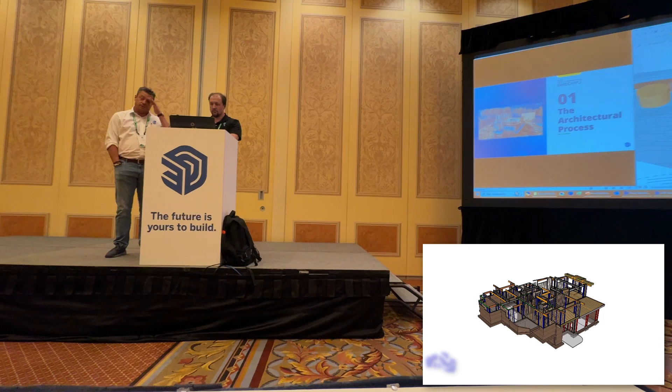So a little background on this project. This is a project inside the town of Truckee, which brought along its own set of issues because it's on a pretty steep slope. As you can see, it's between 10 and 15%. The first thing the client asked me, we're on site and I'm looking at their steep slope, and the wife said, I want a driveway that is as flat as we possibly can have. And I immediately let them know the impacts of that on an upsloping lot, meaning that the garage is going to be fully retained to the site.

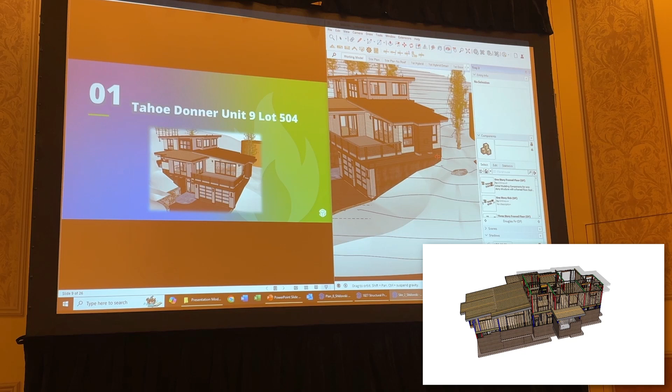So I told them that we're looking at pretty high premiums on the construction cost in order to make that happen. On this home, as an example, I think we had 1,300 cubic yards of export on the property. Along with the added concrete, some of the walls in the back of the garage get up to as much as 12 to 13 feet in height. Knowing this and working with Zachary a lot, it helps me to approach the project to try and minimize the impact of that excavation as much as possible.

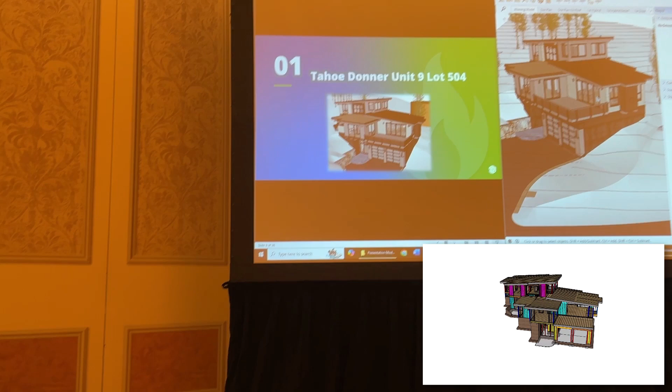So as the home progresses into the hillside, I did a lot of stepping and elevation change within the crawl space and foundation area so that we didn't have a continuous 12-foot retaining wall all the way around. So once we get past the entry, those retaining walls start to reduce to about 8 feet of height. And originally, I was thinking this is all going to help us out with our height because we have a new height restriction in the town of Truckee that makes absolutely no sense.

And even with the middle wall retaining 6 feet in that back corner and doing an 8-foot high plate on the top floor, we only gain about 12 to 18 inches below the building height restriction. This was one of the first projects to be reviewed under their new height restrictions. So I let them know these are the impacts. We're not going to have too many traditional homes anyway. It's going to have to be more low profile roofs. And they seemed pleased with themselves. So it was even more frustrating dealing with that aspect.

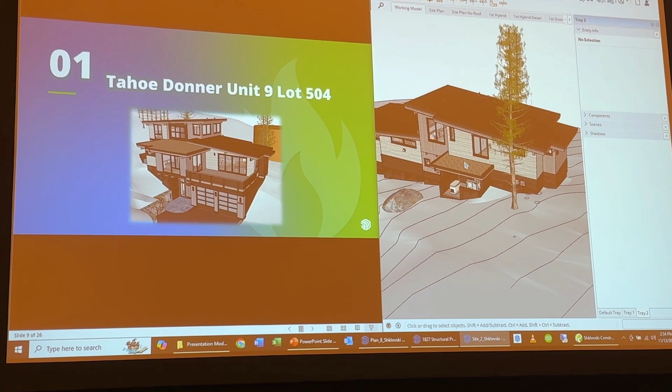But over the years and experience, I know a lot of thicknesses that we typically deal with for our floor cavity, for our roof cavity. I'm pretty good at guesstimating sizes of beams so that I'm not going to be completely surprised when David and Jesse get on board. So usually I get them involved not when the model is at this level, which is construction documents level. I get them involved right at the end of schematic design when it's really just simple openings, simple structure, to get some initial studies to make sure we're on course for not only beam sizes but shear walls.

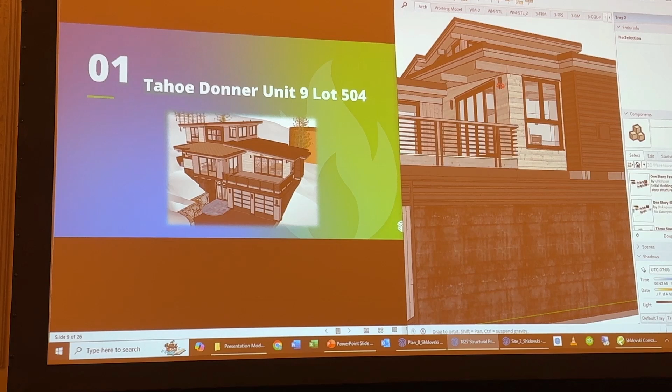This home in particular had a little bit of an issue with this rooftop deck and then a large window running across the garage on the rake side, so not the bearing side, but still taking quite a bit of load at that location. So I knew we were going to have a big beam spanning right across the entire garage. It kind of worked with the client's program. They wanted oversized garage doors. So while these look tall and skinny, those are actually 10-foot wide doors by 11-foot 3-inch tall.

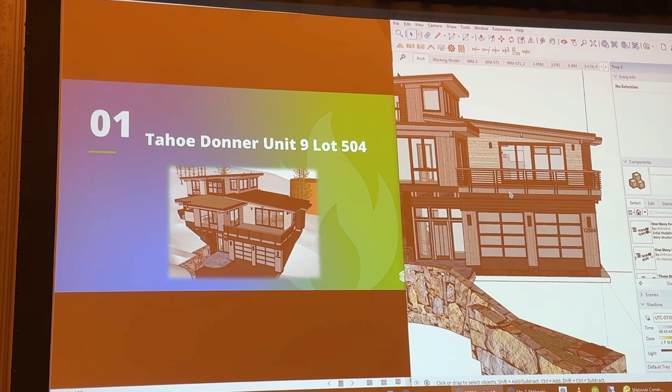And so I think our floor to floor on this is 16 feet from the garage doors to the middle main level. And so as I'm progressing through these designs, as an architect in our area, we have to be very cognizant of structure because we are also in an earthquake zone, high wind zone, and extremely heavy snow load zone. So the snow load on this property, I think the ground snow load was 249 pounds per square foot, which wasn't that bad.

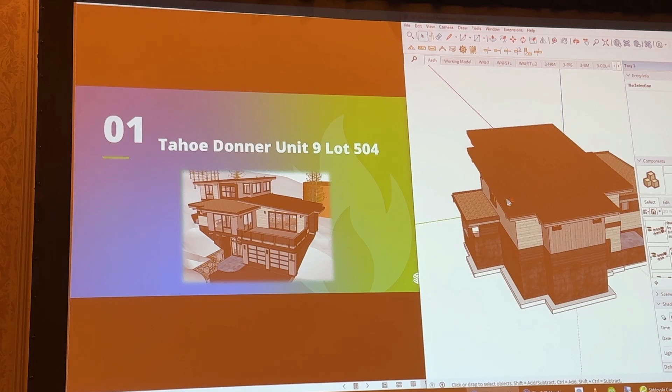My house is actually only about a mile from this home, and my snow load jumps up to 350 pounds per square foot. But it's a giant amount of weight. You know, we're talking about the weight of parking cars on top of cars on the roof. It's significant. And so we have to be careful how our roof forms work, that they are snow friendly, that they shed away from people, away from where cars are, away from areas that could sustain damage.

You'll notice there's a little roof over what is a generator and the heat pumps on the outside. We have to put those under a cover or they will just get completely destroyed in the wintertime. In fact, the generator won't even kick on if you have it just sitting out in the snow, because once its exhaust is filled with snow, it shuts down. So you have to have them under some type of snow cover. So you can imagine that, yeah, I want a generator. It only costs $5,000. Unfortunately, the enclosure we have to do will cost you another $75,000.

So then some people decide maybe the battery packs are a better solution than the generator, but these folks are wanting a generator. And so I do try to combine them with areas like if we have heat pumps or if we have just standard condensers, we need a cover over those anyways. So we just make them a little larger so we can still maintain all the clearance requirements between the heat pumps to the wall, heat pumps to the generator to the wall, and so on. It just keeps compiling.

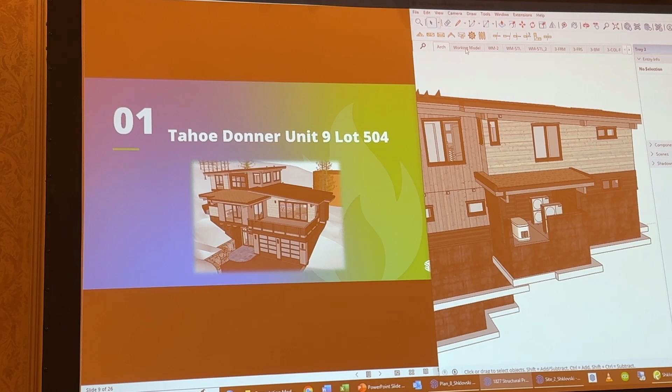But that said, what I do then is I will usually get a preliminary model from Jesse, and we'll start talking about lots of different things. One in particular, when we get down to the foundation, is making sure we have clear paths within the crawl spaces to run all of our ductwork, making sure we have ceiling areas that have soffits set at correct heights so that we can freely run our plumbing and ductwork as well, so that we can actually service all the different areas.

This one was a bit of a challenge because they actually had an outdoor patio area that ended up being fully enclosed with the exception of that one opening you're seeing right with the cursor. And so I had to run a deep soffit all the way across that space because above that were two bedroom suites. So we've got to be able to run all our ductwork and keep it insulated, because it's technically exterior space because it's not heated.

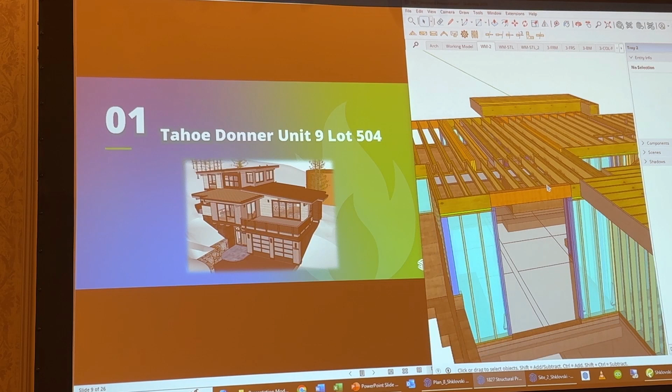The owner someday wants to close it in, so we set it up for that. We set the slab down enough that he can come in with a sleeper system, insulate it, and actually I think we call for insulating the slab anyways, but he can add additional insulation and then flooring and make it flush to the main home. So it'll be a simple conversion when he wants to do that.

And so Jesse and I will just go back and forth. I'll get a preliminary model. He'll size some beams for me that I'm concerned about. Sometimes I'll ask him for one right away, specifically, so I can see what the impact is and go through it with the client and give them some options, like that steel beam going across the middle of the great room.

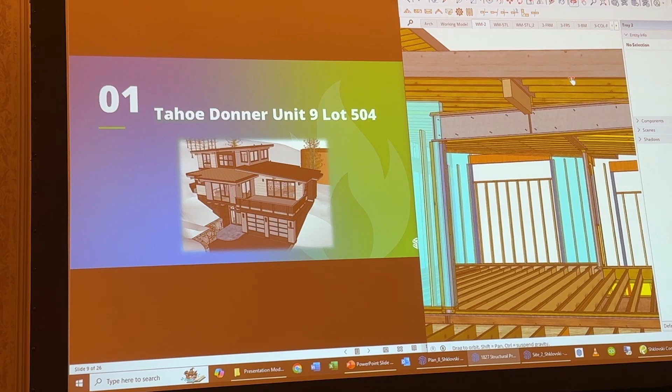Originally, we were going to run a beam down low, and I looked at the client and said, do you want the ceiling just to run all the way through, and we can do some false beams up pretty tight, or do you want a true wood beam, or steel, I guess, because it's such a big span and a huge load, running right through that living room. And so he got to choose and be involved with even that type of detail, which I think clients really appreciate.

And we can let them know that there's a cost impact. I mean, at that stage, we're not giving them hard numbers, but you're probably adding another $20,000 for that steel beam pushed up into the joist bay, and now the joists are hung instead of sitting. That all has impacts on cost, on how it's installed. And so it's really nice.

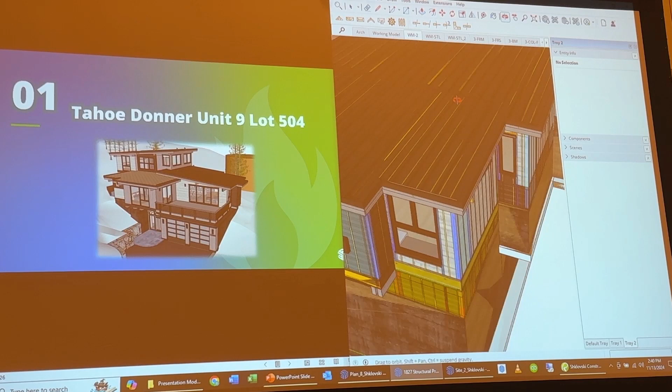You can see in this model, you notice Jesse actually has my model loaded into it. So that's how we do our coordination meetings: we just look through the model after Jesse has sized some things up. And Jesse's good about saying, hey, some of these are going to project into the space. This is where we are. And then I can address it architecturally.

And so we'll go through the model, and most of the time our meetings are short because we just do this. We go through the whole house, check each space. We go up underneath into the crawl space to make sure we have the openings that we need to continuously run any ductwork or plumbing or drainage, things like that.

Likewise, these guys also do all of my civil engineering on every project, which they don't use SketchUp for. They do use Civil 3D. And what is nice about what I do initially is before civil engineering became required, which is what's happened because a lot of architects aren't the best at figuring out drainage, it is something I always dealt with.

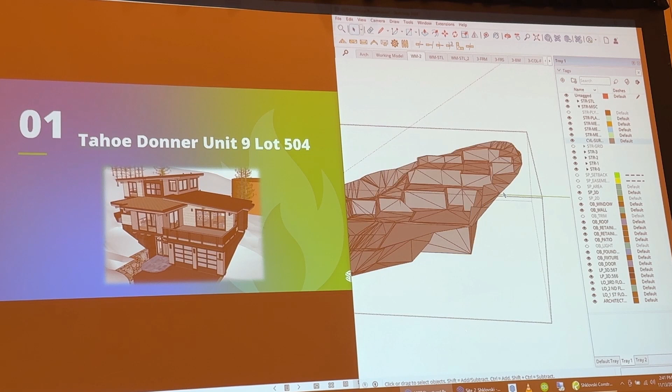So in my model, before they even see it, I start to physically model the drainage around the home. So I create the swales to code as best we can in the mountain environment. And I let them know to look at where I'm cutting. I'll identify this is where we're going to have a major cut in the front. This is where we're going to have a major cut in the back. Originally, we had this as tiered retaining walls.

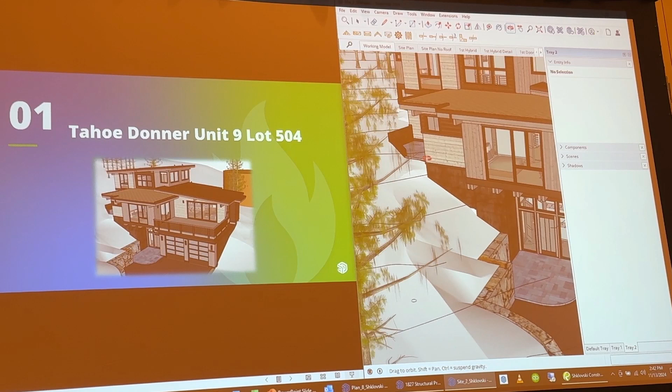And at the time, we had this new rule they implemented on retaining walls that you can't go over 6 feet in height unless you get a special use permit, which was a 3-month process. Again, something we've been doing for the last 30 years. So they've pulled back on that. Now it can be done just as a variance, which is nice. But we didn't have that luxury.

So we had to pull out all the retaining walls and change all the grading and set our walls at 6 foot max. And then they required both me and Jesse to pin the elevations of those retaining walls all the way down to the area drain. God love government agencies, just the best.

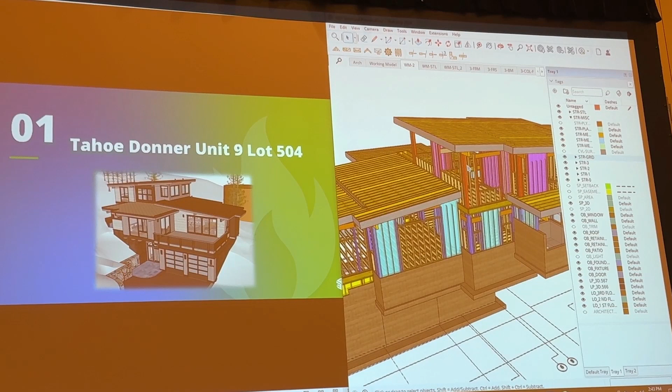And so if you're lucky enough to have a good structural engineer that utilizes SketchUp, it makes for a much more streamlined process. We just don't run into the headaches in the field unless something has been changed by the contractor. We just don't see giant change orders anymore, or any issues with headers on stairs, or having enough shear wall, or a window or a door being in the wrong location, because they're physically modeling right off of my 3D model. And so it just coordinates by itself. You just don't run into those issues.

Except occasionally when I have a hood vent that backs up to a double-sided strong wall, and then I call Jesse in the field and say, hey Jesse, I need a 10-inch square hole in that shear wall all the way through. And while I was on the site, before I left, we had an SK ready to go to the inspector with the fix for that, which, if you're interested, required two 1/4-inch steel plates on either side of the wall with, how many screws?

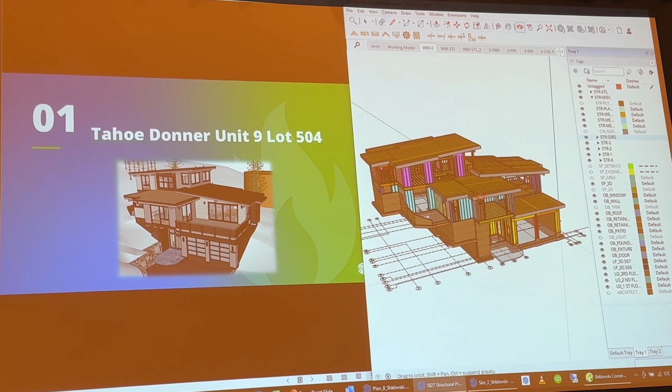There's like 30 screws each side, but still, overall, a fairly simple fix for the contractor in the field, especially this contractor in particular, as he has a robotic plasma cutter. So he can get the plates out to the site within an hour if he needs. Yeah, we send a DXF out. They actually send him a DXF for the plate, and they load the DXF into the plasma cutter. Yeah, exactly. With that contractor, I've done some pretty cool stuff on decorative knife plates. Well, actually, they were structural knife plates.

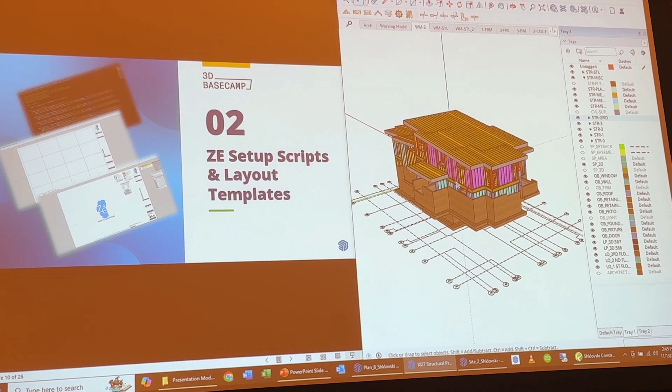There's an old SketchUp video from when I did the first videos. It's an octagonal room with roof framing, all 12x12s that come to a single point. The center steel ring is a series of these giant knife plates, partially exposed on the underside, into each of those 12 rafter spots.

Mike got the DXF file, they fabricated it, and I think they had it out on site within 3 days. It was massive, probably 5-foot diameter plates, and it just fit right into place.

I usually try to get them involved at the end of schematic design, once we have HOA approval of the basic massing of the building and the client has accepted the floor plan, the layout, and the general look of the home. Then I'll get them started, because on a lot of homes I'm making assumptions on beam sizes and ceiling joists.

I typically set them for 14-inch LVLs, and on this one we had to bump up to 16s because of the span. So those are adjustments I'll make in my model to match, which is nice because I'll take their model, push and pull it up, and clean it up against where it hits a wall or the eaves.

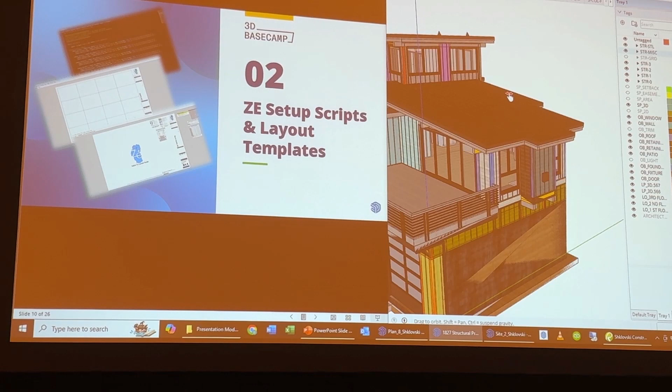So as Nick mentioned, we get a model from Nick, and from there it's about setting it up so it'll talk to our system. It takes a minute to figure out how you want to set up a plan set, you look at the architectural and go, okay, here I've got 1 floor, 2 floors, and a base floor. So this is probably going to be a 3-level plan set.

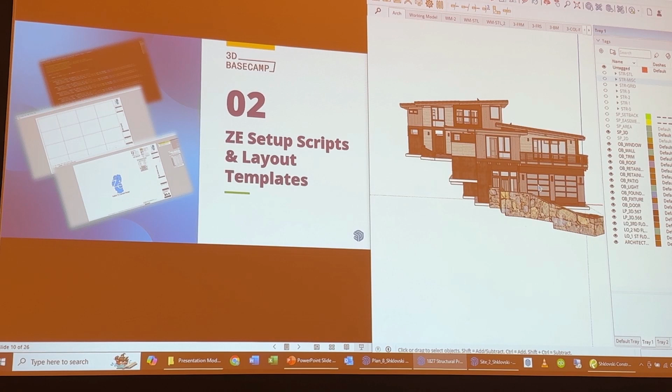It's going to be slab at the bottom, we have the garage, so in my head I'm thinking, okay, we've got a 3-story slab floor. That's the plan set we're going to order with.

We start there because everything we do from the beginning, running our scripts, relates to the components we bring into the model, modeled directly in his model. So there are no coordination issues from the start. All of that talks to a 3-story slab template that relates to the same components we ran the script on.

By doing that, we've made it very quick to go from his model to, a day later, having rough wall outlines, and we can have a discussion very quickly before we even get into design about what it looks like.

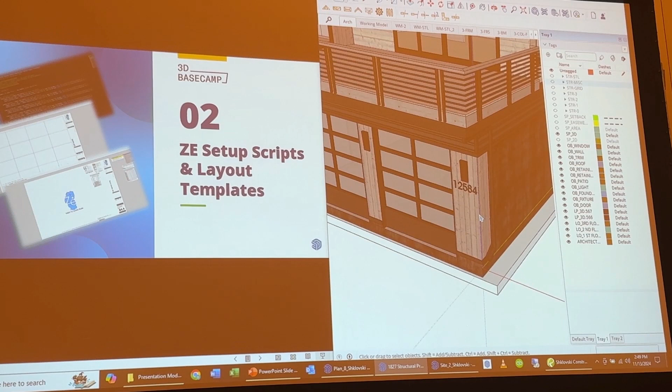That also allows us to match his plan set exactly. So when you're turning sheets in the actual set, the corner right here is at the exact same point on the page. If you're trying to stack and compare, or a contractor is looking at the paper, your eyes don't move, which is better because you're not jumping around and won't miss things.

One thing that's really important is Nick sends us his walls at 5.5 inches, so 2x stuff fits right in there, and we can align things perfectly.

We don't have to deal with sheetrock and siding and other things. A lot of architecture firms we work with don't always do that, so you have to do some workarounds sometimes. It's in coordination before you even get to start modeling. Where's your stuff, guys? I need to know where to put it. I can do it for the whole house, but I need to know. With Nick's, it's so clean, I can get this and start modeling.

I think our first meeting was like 2 days after you first sent us the model. Okay, well, here we go, let's get moving. Which is pretty cool on a house this size. How many architects are in here?

Do you show finishes on your plans? Or sheathing? Good, that's the right answer.

There are a lot of architects that want to show everything, they want to show too much, and it's hard to get it across. But if you have a contractor in the same room, ask the contractor if they care in the construction documents if they're showing the drywall, and they say no, I just want to know where the stud is. I want the outside face of stud, the foundation edge, that's what we build to. Everything else gets added on to that. So there is absolutely no reason to be showing all of that at the level of detail for a quarter-inch plan, which is what these models generate. Now when I do my details, and these guys as well, they won't necessarily show finish. That's when you add all the extra material on those things. That keeps the models very light, fast, and easy to document for construction documents, because everybody wants face of stud dimensions.

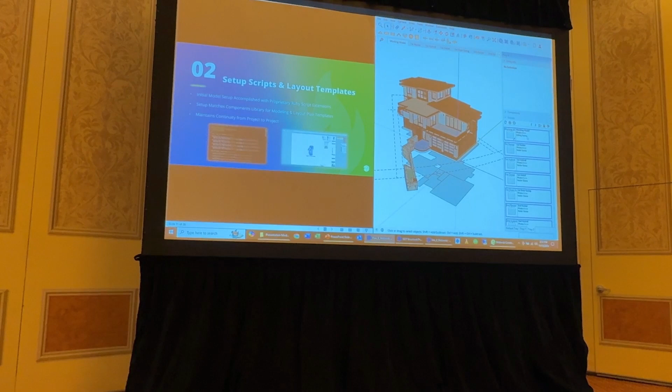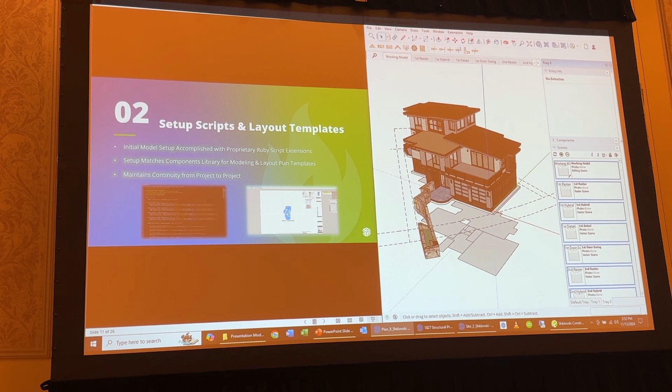Okay, we're just going to focus kind of on the stuff that I just talked about. So this is Nick's blank model, right? The first thing I'm going to do in here is remove all the stuff that doesn't really help us. All his scenes help him a lot, but they don't help us at all. We have his PDFs, we have his layout documents, so having them in the model is not that important, since we're going to make it our structural model like his architectural model. So we're just going to go ahead and delete the scenes, right?

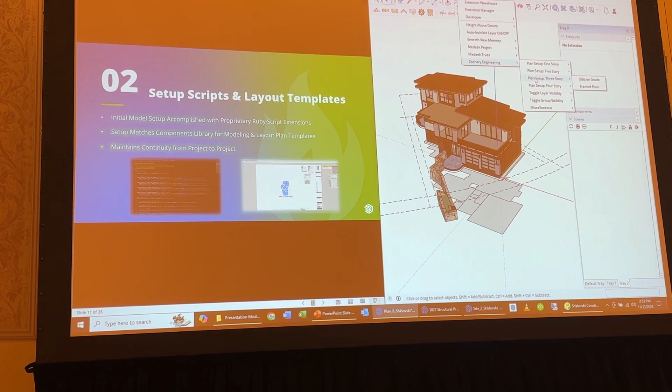And we just talked about, we've got that 3-story with a slab on grade. So our internal extensions, we have these set up for all our various options - 2-story slab, frame, 3-story, 4-story, and all our fun stuff. But we've got 3-story with a slab and garage. So what's going to happen here is - actually, before I do that, I'm going to go to this. Keep my little prompts - suggest you. It's a 4-hour process.

It started, I wrote the first one about 12 years ago, and it's developed a long way since then. It can do an awful lot.

So what it's actually doing here is we are generating all of the tags that we need to match all of our templates. All those tags are getting put on the correct scenes, automatically.

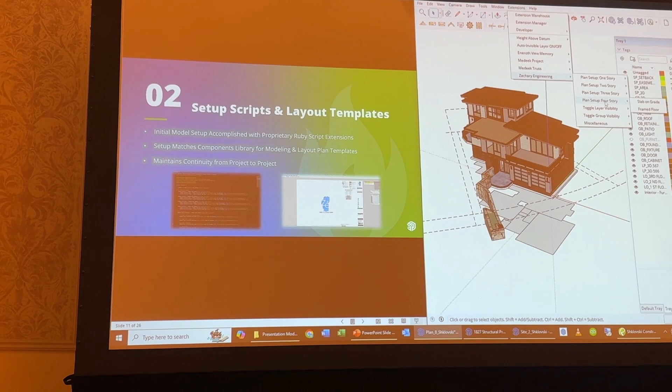We stack our viewports with our raster at the bottom, and then multiple vectors on top. So we'd have our framing down below, which we'd fade out with fog. Then on a framing page, you have your beams, and a column on top of that, so you can see the columns above the beams. If you put the column layer below, you can't tell what's where. We use a coloring system to tell on the plan whether the column is above or below.

So it's setting all that up. It's deleting any extraneous guides. It's setting up our custom styles for various scenes. And it's setting to a parallel projection top view and adding fog to all the framing layers. I'm sure it's doing a couple of things I forgot, but that's the general sense here.

Let's watch it run. Yesterday it ran okay. Let's see, no goes, all that. It eliminates about 4 hours at least per project.

So we see it drop all the tags there. It's working on the scenes. Good as heck, and good to go.

So if we go ahead and expand all these, we've seen what is added. Also now we add all of our potential steel shop layers into every project, as I've created templates for that as well. So every project has those in case we end up doing steel at the end.

But that's everything that thing just generated. Even on this slow computer with a bunch of stuff going on, that was pretty darn quick, right? Here's the scenes, and all of our scenes are here.

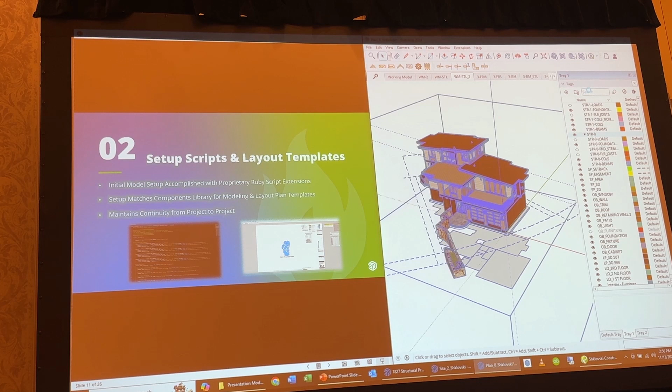Alright, we'll still hear stuff. Okay, so from there, essentially the same thing. We've already got all these scenes set up. They're the same between the two models, obviously, because I just ran it to show it.

But what we're going to do is go to our internal component library, and we're going to look at our modeling, our basic modeling. I know in this project, in that area, we're going to use a Doug fir number.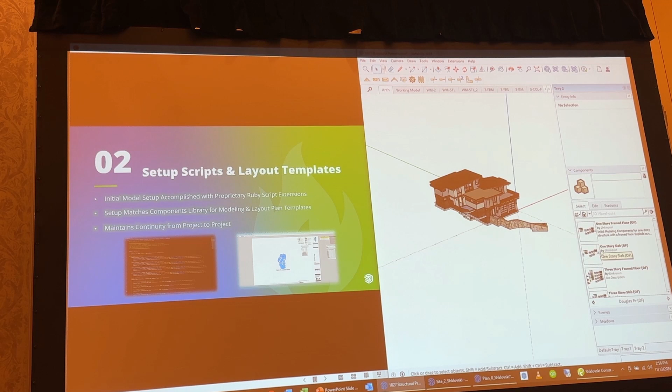Okay, that's important, and I'll show you where it comes in. We're going to go to the 3-story slab again, grab the 3-story slab and pause. 3-story slab. Oh, now this one's going to freak out too.

Here it is. Oh, so the layers are turned off here, but I'm just going to click it. We'll turn the layers on. Text.

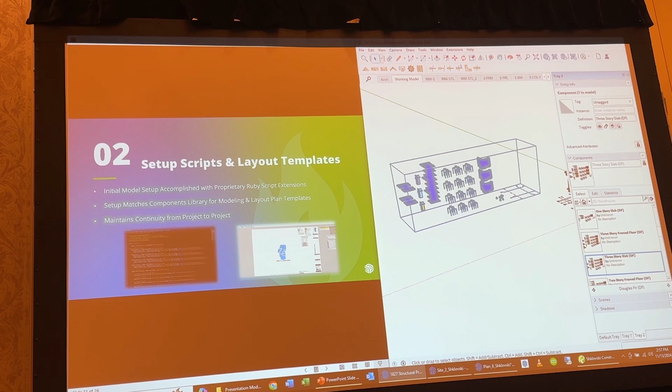There we go. Okay, so you can see what we just dropped in here, all this stuff, and I'll move it out of the way. I know when you bring things in from the component library, even if it's a bunch of components, it comes in as a single component. We don't want that, but it's a great way to quickly drag things that you want in.

So the first thing I'm going to do here is just explode the thing. That is not a component, I don't have to deal with it, and everything's already set. And what we'll see is if we look at entity info, all this stuff we can grab to model, directly model with, but it's already layered correctly, right? This is all where it should be.

Walls, beams, grids, foundation, takes out all that step of if you just brought some random component into your model and then, oh, I gotta go add it to a layer. Again, we're talking seconds, 10, 15, 20 seconds, but if you're doing that for 100 components, now that's a very, very quick run, right?

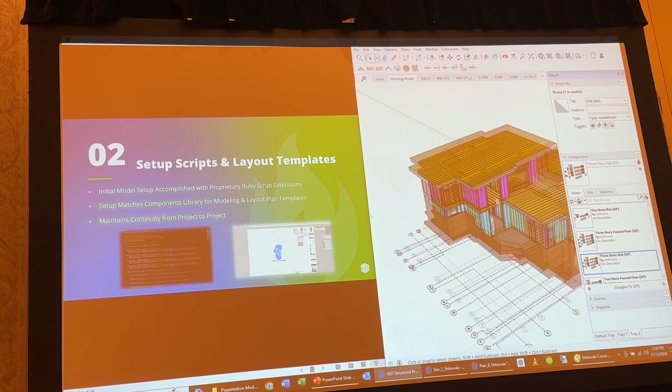And a lot of times I like to go with the 1-1/8". Yeah. Now we know that we get push back a lot of other places, but with Nick, we don't even ask him anymore. We just go with 1-1/8", then a deal. It's just a better floor. Yep, better floor. Good for hydronics.

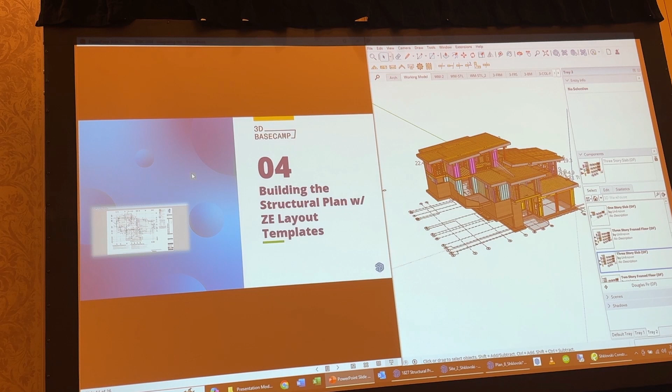Okay, so the magic part, we just go through when we model this thing. I think we saw that video at the very beginning. I'll just let it run here. Oh, no. Sorry, I met you back. Oh, I don't get that.

That's all right. We kind of saw it running, but we will actually go through this thing. Come in, drop it in, model, adjust, make unique, move on. That gives us control. Our base model, before we do any design, we don't use a lot of extensions. We find we want a little bit more control over what we're doing, and we haven't found the best way yet to use a lot of extensions to speed this up any more. That goes with our process.

For instance, this model, I built the pre-designed SketchUp model for structural in about 8 hours, which didn't have any design member sizes, just had base sizes. We know for a Truckee, we just always start with 6x12 Doug fir beams. That's just how we do it. We need to put PSLs on the floor to match the depth. That's just how we mount it. And once it goes to an engineer, after your pre-designed model is done, that's where we start adding member sizes.

And in that respect, again, with the component library, if we have steel, it's all internal. We don't have to hunt the 3D Warehouse. So if I know I need a W12, I can grab a W12 by 106, nice size beam there, right? I have everything I need to go ahead and model. What we'll notice here is these are also on the layers that are going to talk to my steel shop layers that have already been built in. That saves me another step, right?

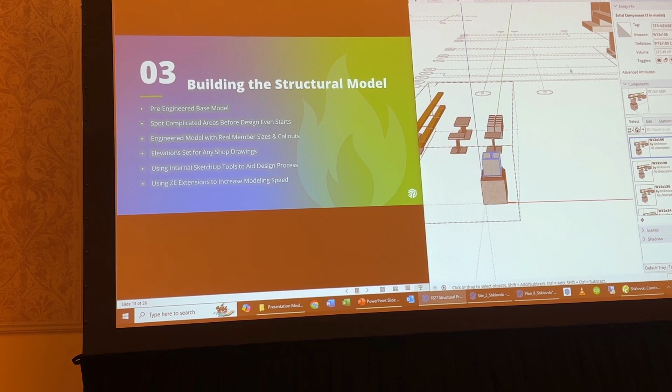The reason we do steel shops and put them into our plan set is our review time is obviously 0 if somebody else is doing it. And this review time is also exactly the same, 0, as none of it's a surprise. So if you sub those out, the cost is nearly the same, but the review time doubles the price because we charge to review it. So is Nick. It's very expensive if somebody else does it.

So we just had the pre-designed model. Once that pre-designed model is built or kind of in the process of, we will go ahead and create our plan set and get it started. So if we're making notes or we have a thought or we talk to Nick, we know we need to do something over here. We have a placeholder for those spots, not just the sticky note on your desk.

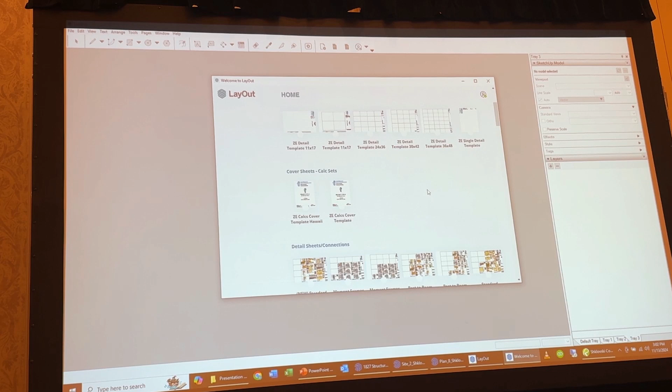So remember, we were at a 3-story slab structure. That's the script we were in. That's the components we brought in. Now we're going to come into our templates and layout, my templates, there you go. And I know Nick only uses 24 by 36 sheets. That's actually wonderful. A lot of other firms do a bunch of random sizes and you have to just make do. But 24 by 36 is great. So we're gonna come down, we're gonna find our templates. 24 by 36.

30 by 42 don't fit comfortably in a tailgated car. I didn't know that, and then you get the fun 36 by 48s there. I see a lot. You can't without a sheet of plywood. Carrying them around, you get your workout in, right?

Okay, so we're gonna open our 3-story slab structure on a 24 by 36. Now what we'll see here is that we have all of our layers set up.

All of these pages all have scenes. They're all ready to go. And as soon as I click relink, which I'm not going to do because it would freak out on this laptop, our model is going to be here. And then all I have to do is match grids, which we put in the model. Nick doesn't. We do put them in the model. And we just grab his grids from his layout sheet, paste them to our plan, turn our grids on, and match the point on the page. And then there we have a starting point for our plan sets.

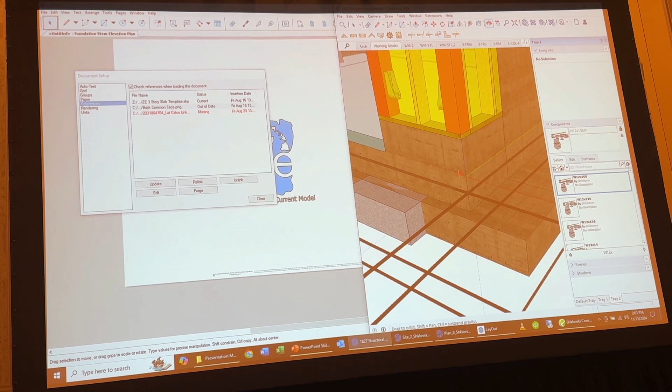The reason we put our grids into the model is so that in the field, when they want to go from 2D to 3D, they can scan a QR code. In the future, it's going to be a link to a website or to an app where you can actually play around with the 3D model. And so you can really quickly go to a spot where you want to be if you have your grids.

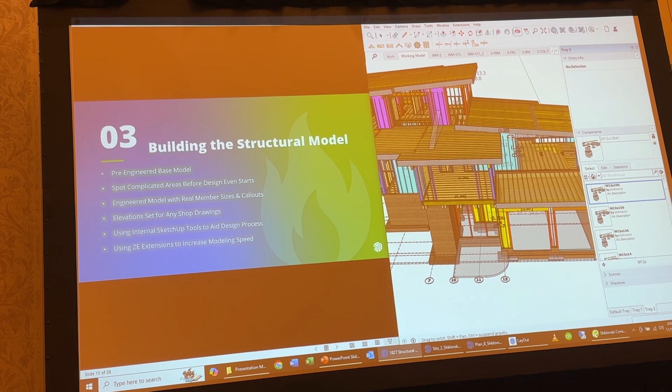Real last thing we'll touch on in the model here before we move more to the plan stuff is if you're having issues, find ways to solve them quickly rather than just repeating the same thing over and over. Our drafter brought that to our attention. That's a really good point. Why are we doing this all by hand, turning layers on and off and running all this stuff? So what we did is we wrote scripts, which you saw me using while Nick was talking.

Now you've noticed, how is he doing that? Well, I'm turning all this stuff off as I'm going. And those are all just custom scripts to turn custom layers on and off. Okay, not a big deal, you think? One cool thing is, when you move a face in a component, if you go turn a layer on and off, you're no longer moving that face, you have to start from scratch, right? But if you go turn something on and off and you're in some complicated little area, it doesn't work. Well, we can come in here and redo this with scripts.

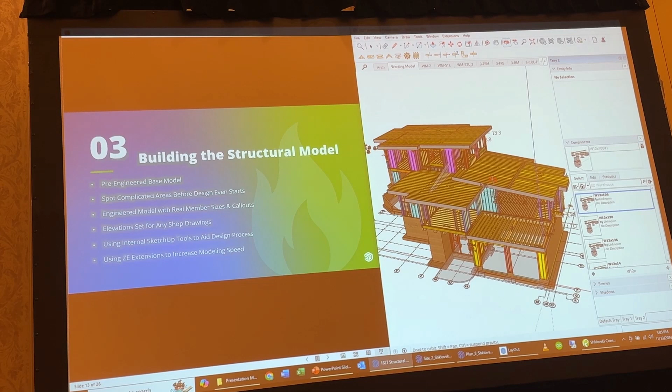I can do all kinds of stuff. I want to turn it on so I know how to move. Again, we're not saving a lot of time, but 2 seconds, 3 seconds every time you do that. And if you think of how long it takes to model some of these big structures, that's several hundred times a day. It ends up being a lot of time. And whether you're doing it or a drafter's doing it or someone else, it's a substantial amount of time just to turn that one off.

So my little suggestion there is you can find me in the forums. You can email me. I can point you in the right direction. But if you have little things like that, that are really pedantic and tedious, how do we not do that? There are ways to do it. Let's move on because I'm going down a road.

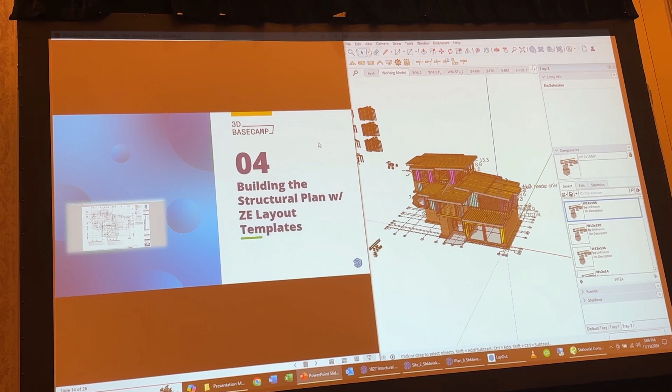Okay, building the structure. I did that in the second session yesterday. Okay. So what we've got is building a structural plan with the LayOut templates, right? So let's hop back into LayOut real quick. Let me open up the file for this project. Scrapbooks are very important. For us, when we're doing a plan set, a lot of the callouts are built in so that you don't have much to do.

Now, when we brought those components in, all of our data comes from the model. So our component instance is labeled as what this member is. This is a 5.5 inch by 12 inch glulam. That's 1.35, that's just our calc number for our reference and for each jurisdiction's reference on the calc side. And so what we're going to do is actually use native SketchUp tools to label this stuff, right?

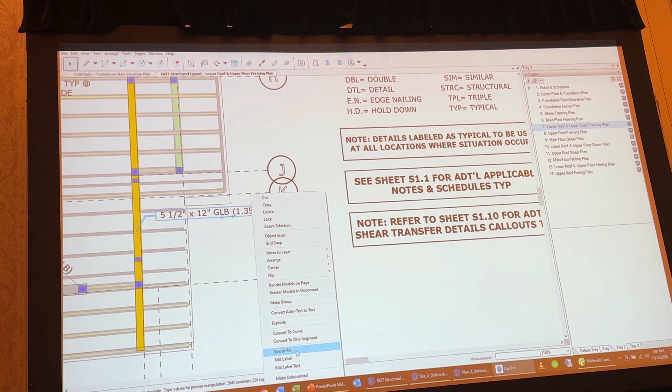What that allows is, when I first started years and years ago before we developed this stuff, it was all done by hand. So your drafter or your designer would look at a calculation set and pick out that location of where it was in the model, find the calc number, and then look at the calc, go, okay, that's a glulam. And then you come in and you go text box and you type that in, you click the calc number, which is fine. It's just another way to do it. Takes a little bit longer.

But what happens when the model changes and the calc changes? The designer then has to go tell the drafter, okay, we changed this to a 6x14 instead. And he goes, okay, I gotta go back to the page, I gotta find it, text it in, and then deal with it that way. But now we have something that is linked. So when you update the component instance column in SketchUp, this also updates. It's one less step, one less space for information to be lost, all right?

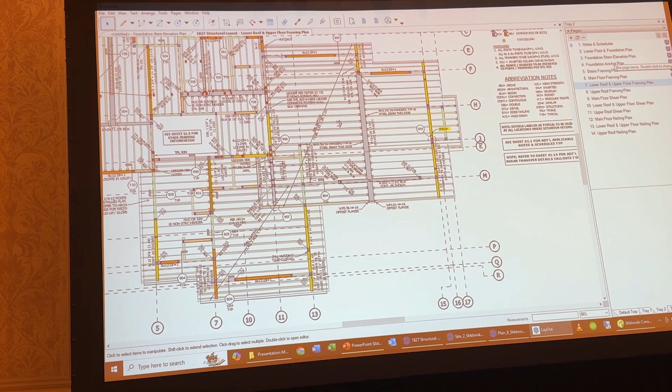Let's look at scrapbooks. So if we're looking at detail callouts or something, that's all pre-built. Just for instance, drop those in. I can pull this out later. Or if I'm on a shear page and I know I need to strap that. Right, we could see how very quickly we can start to build out concept. Just as we go, right? The cool ones that we've just kind of developed, I kind of blew Nick's mind on this when I set it in the first place. I'm not going to say I totally got through it, but we're starting to do stem elevations.

And a cool little thing in 24 is when you're grabbing leader text from scrapbooks. If you can get that leader to align to what you're doing in the model, it will auto-generate the text. You could drop it there like you used to, but then you have to go back and click and select it and it would do it. But for instance, now, when we do this, that's grabbing real information from the model. The cool part about those is we had it built in, and again, this is a custom sub.

Oh boy, sorry. Let's open SketchUp for all. Perfect. Do that all the time.

Okay, we look at dynamic components. Who uses dynamic components or has used them? A few. We use them for shear walls, which helps us with lengths, heights, aspect ratios. We use that to label our plan also, those dynamic components. But what we've done here is we've actually built this in, so when I update this, watch our top is down here, it updates to where that elevation actually is. Now, if we step back, what that means is for my layout, if I've then labeled this plan already and I need to adjust this elevation, all I have to do is update it in the model and update the model reference, and the elevation on the plan set will go with it. Again, one less place for information being lost.

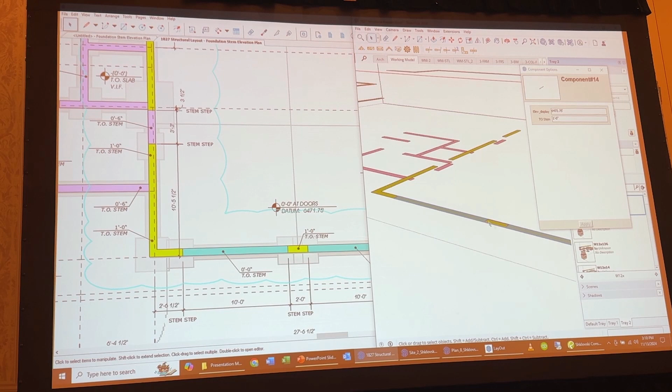Okay, moving on. Those are the big ones I wanted to cover there. I'm gonna come back to the Excel thing if we have time. Who's using Excel to talk to LayOut right now? Anyone? A little? Okay. I'll come back to that. I hope we have time. Moving on. We want to look at the detail sheets. I'm going to jump in and look at our detail library. You had a couple in our library session yesterday. Just a couple that I see here.

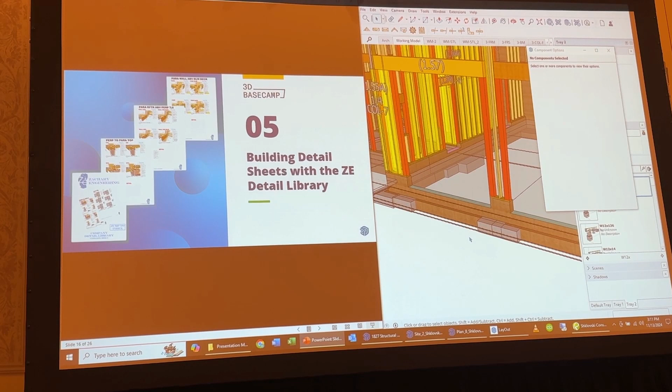But what we've done is we've generated an internal component of the detail library where all of our details are housed. One of our biggest problems was being able to find details we've already drawn. How do we limit LayOut size? How do we make LayOut better? So it's fewer models and an easier way to flag in. So what we ended up doing, here's our detail library, right? So as we start to build a detail set that corresponds to this plan set, we're just gonna pick a detail. So let's just say I need a floor-to-floor shear transfer detail, right?

Let's say hydronics on this job. Need hydronics on this job? No hydronics. So traditional flooring, we use TJIs, and I need an exterior detail. So kind of standard here. We have some fun ones with the deck. So let's just say it's a parallel TJI with a wall above and below at a depth. Cool. Okay. This is all 8.5 by 11 flat. There's nothing here. All right.

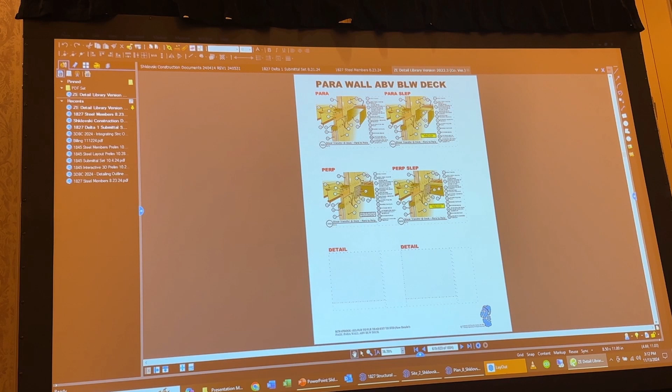So let's just say I need that detail. I could redraw it. I could use Windows Explorer to try to find it, which I don't recommend. But that's possible. Instead, what we did is we built this. I know the page I was going to. I copied that. I didn't open the detail sheet. Let's do that real fast.

And I have my first detail. Now I know I need the same thing, perpendicular version, but it was very, very fast to find that detail. Right? Who does detailing for any projects? You want to deal with detailing for layout, all that kind of stuff. Windows Explorer to find multiple details? Yeah, it's a pain.

So we do this, and there are fast ways to edit some of these details if you may have a custom situation. We don't have enough time for me to run through that, but we did record sessions from yesterday, so those will go up online on our website. So if you're interested in more of that detailing stuff, do log on and see those, because it is some really cool stuff.

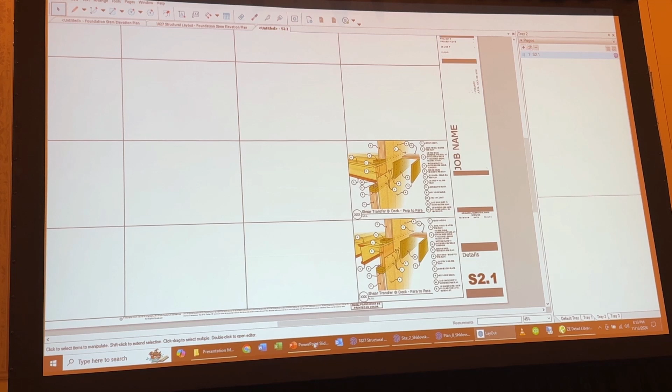Oh yeah, didn't mention, we've got in the company version of that library now over 6,000 details in that document. It's a 2,000 page document. Right, and it operates totally fine. It can open up on any computer in our network. It'll open those files, yeah. Just a question: you pull those details from that scrapbook? They're built as layout templates. They're not housed in a scrapbook. We'll call them scrapbooks, but they are not built in as a LayOut scrapbook.

So if I come into scrapbooks, I don't have those loaded in here. I can't find them this way because with that many files, our library is built into 180 different layout scrapbooks, right? And that means every time I click this, it's going to try to load all of those internally so it can find them, which is fine, but I really don't like sitting there waiting for the thing to load. It takes a lot of time. It's just not super fast, so that's why we developed it that way.

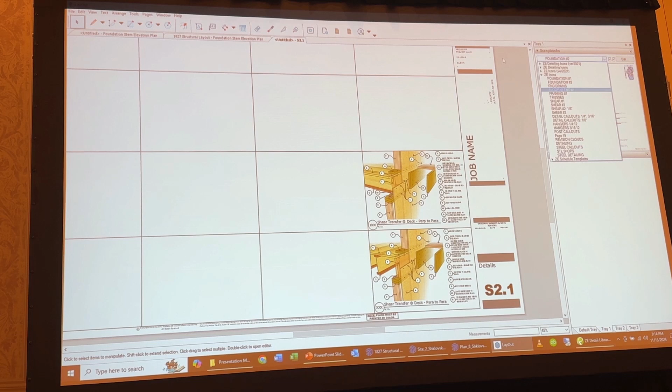Okay, that last screen that you were on that you're finding them in? It's just a PDF. Oh, it's a PDF. This is just a PDF. We're using Bluebeam. This is what we use for all our PDF stuff. And this is just a PDF with hyperlinks. And it's a lot of setting it up so that it knows where it's going. But yeah, it's just a straight PDF. How did it find the PDF? Right here. There's a hidden hyperlink. Oh, okay. Gotcha.

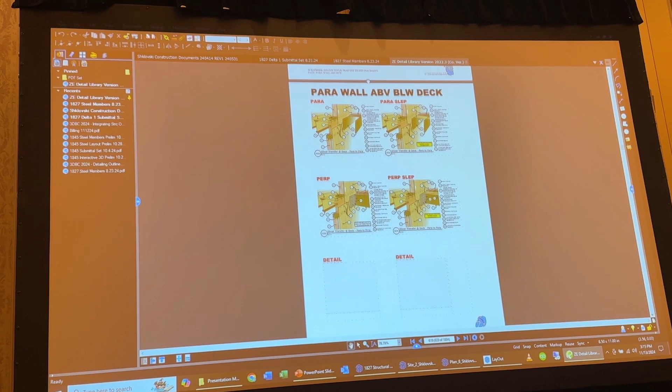And so when I click that, I just have to remember what page I was looking at. I can't tell the hyperlink which page to open LayOut to, but I can tell it which document to open. So I know I need perp wall above, below deck. I just remember that. If you don't, just switch back to that screen. Normally I don't do this on one screen, I do this on three screens. But usually by the time I get to LayOut, it's open.

See, the hyperlink is opening a layout file. For those that don't realize, templates, scrapbooks, they are all just layout files. You can store them as templates and store them as a scrapbook if you like, but they're all still just a layout file. And then there's that detail we need. We can close this out and move on. Do check out that detail video when we get it up, because we went pretty hardcore on that yesterday.

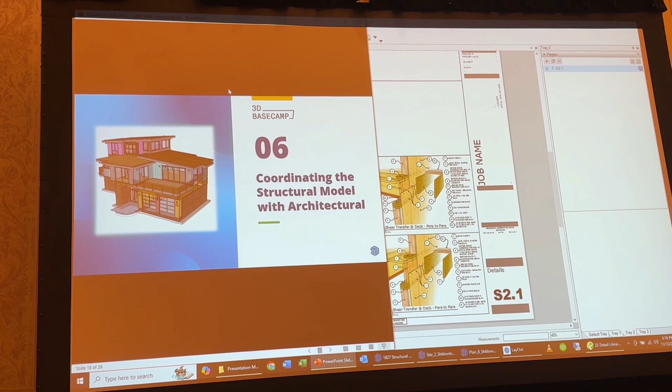Coordinating the structural model with the architectural. Nick touched on this a bit at the very beginning. It's hard for stuff to get lost or forgotten in a plan set because we build it straight into his model. I will send him the model, he will drop it into his current model, spin around, see if anything's protruding and whatnot. If he doesn't see any problems, we're done. That's the entire coordination. He would find all the holes from my beams. Yeah.

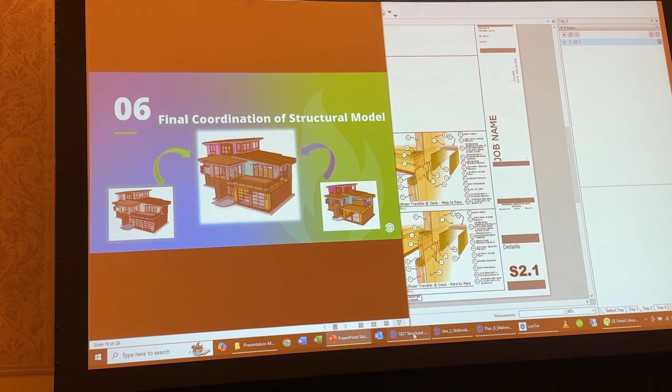Yeah, then one of the last things I do when they finish their model is one more round. It's usually the last thing that establishes all of the foundation sizes. And so I'll update my model to make sure it's matching. Not that I dimension them, but I like my section cuts to make sense. So if there's a giant retaining wall footing, I want my section cut to reflect it and match what they show.

The reality is there is no such thing as a perfect set of drawings. There never will be. And occasionally little things like that slip. Thankfully, that was a pretty minor item, easy to fix. If we delete all the ovens and furniture, we try to hammer out as best we can. Usually cabinets. With Nick, it's not that big a deal. Some of the other firms don't layer quite as well, and so you'll delete something and then go, where the heck's the floor cavity?

Why was that on cabinets? I don't get it. So then you have to go back and find it and redo what you're doing, and eventually you just say, okay, forget it. We're just going to leave the geometry and deal with their file rather than trying to clean up other files. But yes, technically that would have been my responsibility to say, hey, this is going to be a problem here.

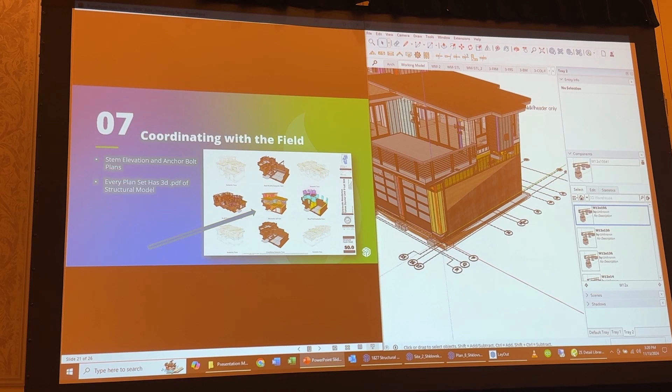But now we need to have something out there that relays the 2D into 3D. And that's mostly because the labor that's coming up and being hired didn't come up through the trades anymore. They're just not coming up as a framer, seeing 2D and building 3D. And so they just can't see it. So on the cover page, we try to show each assembly.

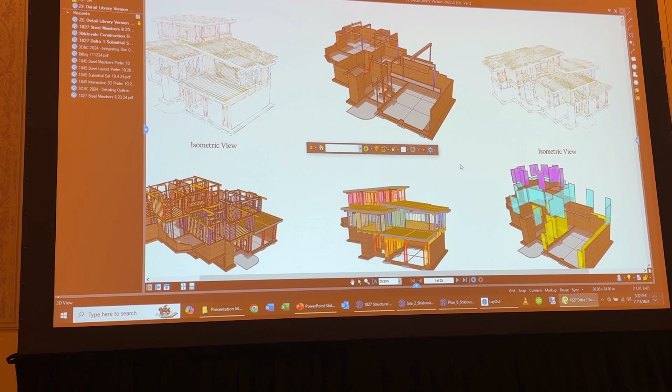This view here shows the steel and the foundation, and we do that so the contractor immediately sees the structure and says, 'Whoa, there's going to be a big steel price in this thing,' so his cost per foot immediately goes up, and there's no surprises there on the way. We remove roofs and floors so they can see all the beams. This is an interactive 3D model that we can change and do different viewports. That's our only model that goes to the field now, that they can move around because we lost the connection, which SketchUp is now providing for us. I think in 2025 we'll have a link that we can put on the plan so they can scan it to the phone or go to a website and still have the 3D models. It's essential that we have these 3D models in the deal.

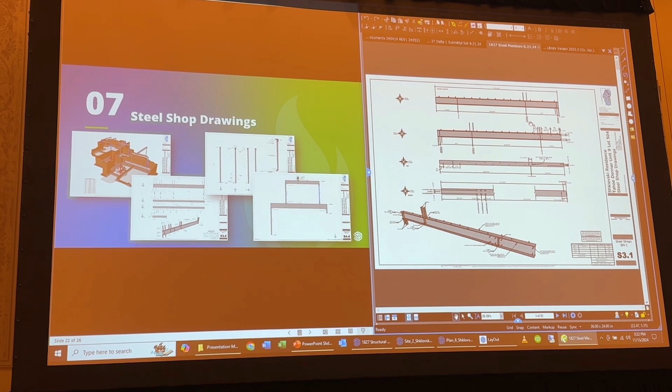That's the reason for this cover page and all the different views, is just to hopefully relay, if they're working on a certain portion of the structure, they can actually see what the 2D plan is showing. And then as we talked about, our steel shops, building those into the model—if we know we're getting the steel shops up front, the contractor's decided they want to use us, we build them. That's why we're asking for really accurate floor elevations, because when we set that top plate, everything works down from there, and when we set the finished floor of the garage, everything works up from there. So we can actually build these right into the model.

And then Jesse, I'll let him describe how he shows them, even every hold down shown in the steel shops. So I think we're putting hold downs in the model when we show those, right? We put hold downs in the model at the foundation level—that's now standard practice. Not necessarily upper levels, unless it's hitting steel. If it's hitting steel, we'll put it on. So we know exactly where that threaded rod goes.

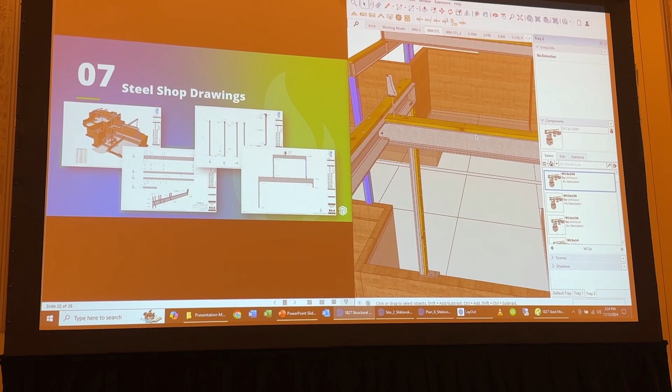It gets welded on, so when the steel comes out to the site, it should be really accurate. And we found that to be the case—one example is in Colorado, at Winter Creek last April. They're roughing in right now. We did the steel shops on that, and that's a 7,500 square foot home. It's less than a year, and they'll be done on that build, which is pretty darn cool.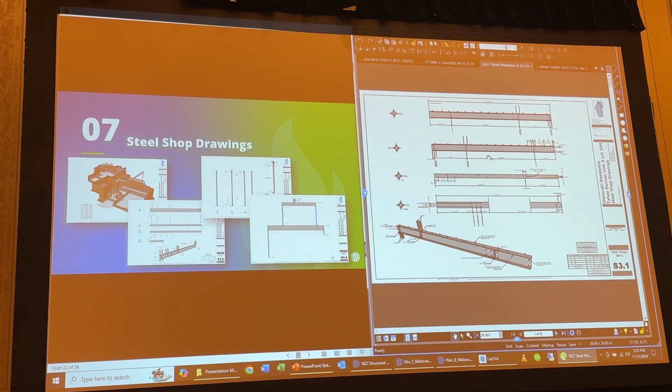So the steel is really just looking at tolerances, how these guys are going to fabricate it. A lot of it comes down to the setup—at the very beginning, that pre-base or pre-design layout is what's setting our steel. If we do that right and start putting members in, then it just becomes detailing. We can put our drafter on this and say, here's the structural set, here's the model, make the model match the details we've designed, and that can all be written here. Then we can generate these steel shop drawings that are down to, for members, down to the 16th of an inch, and for plates, down to either the 32nd or 64th of an inch. Plates you can do that with because they're just getting CNC'd anyway, so they're super accurate. You don't really do that with members, but that's how we do this.

So we look at all these beams—here we go, we've got hold down stuff. These are all in the red locations. Obviously, contractors need to review these and make sure it's how you want to build, but this is a great way to do it. We try to get the steel because it does make projects run very smooth, and we like that—we prefer not getting pulled in later.

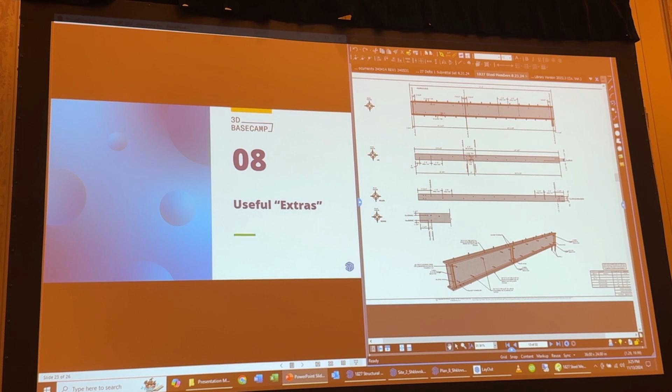Same thing for when Nick gets that model—he can check our steel and those shop drawings simply by grabbing our model, pasting it back into his, and making sure he's not seeing something he doesn't want to see. His coordination is essentially done, with minimal time, versus doing all the coordination yourself, which is almost impossible when you're looking at a 2D engineer plan—it can be really time consuming.

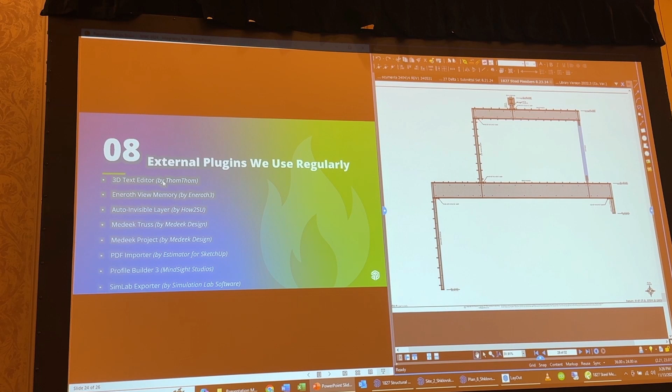Some of the plugins we use, people always ask what we use for plugins. I want to say the biggest one we use most often is ThomThom's 3D text editor. The ability to edit the 3D text you add to the model is a very simple little extension, and I use it 100 times in every model we're drawing.

Eneroth View Memory, if you go check out the detail and get that out, that is key for efficient detailing. Auto invisible layer, anyone use auto invisible layer? No? So we had a bunch of scenes set up, and then we add a layer, that layer gets added to all of those scenes whether you want it or not. Auto invisible layer lets you choose, so you don't have to update a bunch of scenes after the fact.

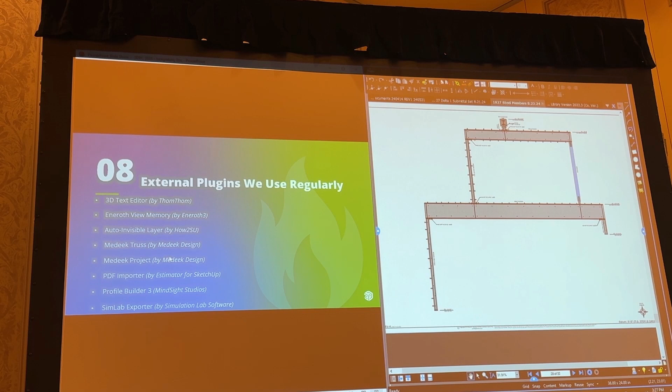Medeek Truss, we use a lot in Hawaii or areas where we do trusses, just because I can draw a complex truss roof in a matter of seconds, and I really don't like doing that by hand, and they're very close. Medeek Project, I only use because he took the extend and cut tool out of Medeek Truss and added it to Medeek Project, so that's the only reason we use that one.

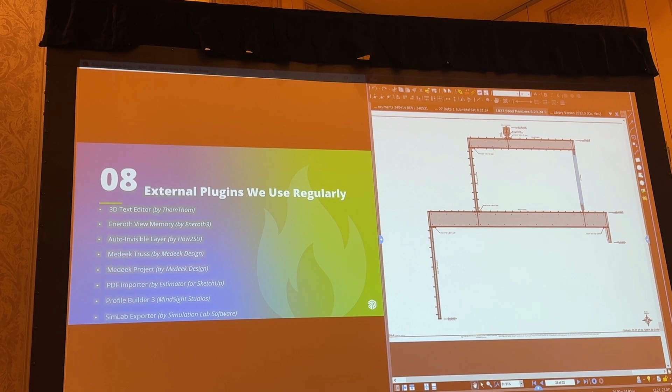PDF importer by John Brock. That's a great little tool if you've got people that are only doing drawings in PDF form or AutoCAD form, old school and can't find the AutoCAD file, which get the vectorized line work. You can pull that into SketchUp with that import, including all of the annotations of text, not just the line work. Really cool little PDF tool. You can see him wandering the halls with his laptop. As per demonstration, it's really cool.

Dale's Profile Builder, we're using version 3 right now. We're using that for steel shops, primarily to draw nailers and studs on top of the beams or any holes, just because it's very easy to go fast and equidistant for everything with that. Takes a little bit to get used to the interface, but once you get going, it's very, very powerful.

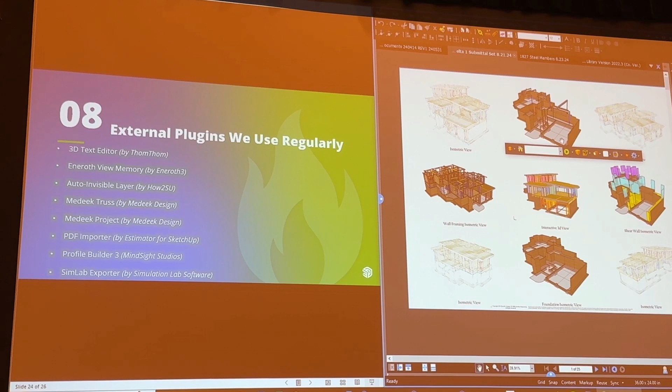And then SimLab Exporter is how we generate the 3D PDFs, which we can do as those ones we saw here on the cover page. We also do them as a full page, like 24 by 36s or bigger if the contractor wants them. We do those for all our steel shops, so when they're reviewing steel, they can look three-dimensional and see what they're looking at.

It honestly depends on your PDF viewer. So again, if you're using a not-so-good one, you're limited on what you can do. If you're using a really good one... we just noticed that this is an old Bluebeam that's out of date, it doesn't have the same controls as the nice Bluebeam we have at the office. So it really comes down to the user on that.

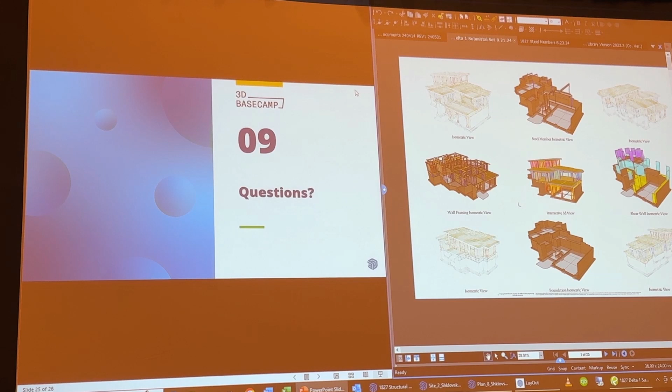When you put in your dynamic components, let's say it's a 2x6 wall, you plot it onto your floor plan, and what is your method for, say, extending that?

So the walls are not dynamic components, it's a group of the components, like the walls. It's actually interesting, when I first started it was all about push-pull, right? And I very rarely use push-pull anymore. So if I know I'm going to go here, I'm just going to move this over.

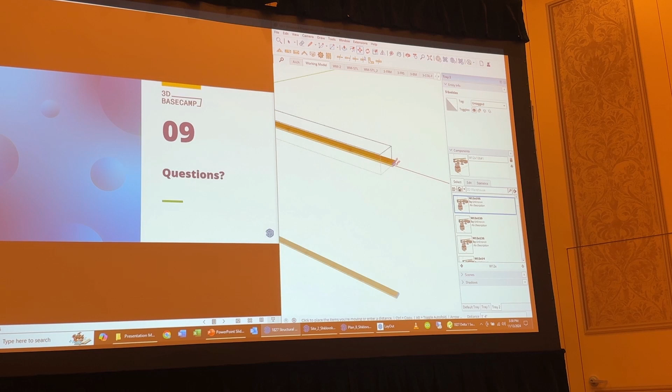Obviously I'm doing a lot of keystrokes here, so I'm making it unique, right? I'm using a left or right box to generate or to grab that face, and I even move to the overhead and lock in the axes with the arrows, I don't come over. You'll see that in the complicated areas, if you're trying to zoom in to get to a specific face, it's kind of funky. When you use a high raster model it's a little bit better, but then I've got to come in, click all the way in, try and make sure you're grabbing the right face - did I accidentally grab the top face? I could just select what I want, left or right box, move, lock in the axis, and I'm good to go. That's the kind of stuff.

We would love something that already does this that we just haven't found. Well, there's a couple, it just doesn't work very good with our system yet. Like Medeek Wall and Brock's Framer, there's some ones out there. But sitting around testing all these and making them what you want is a lot of effort.

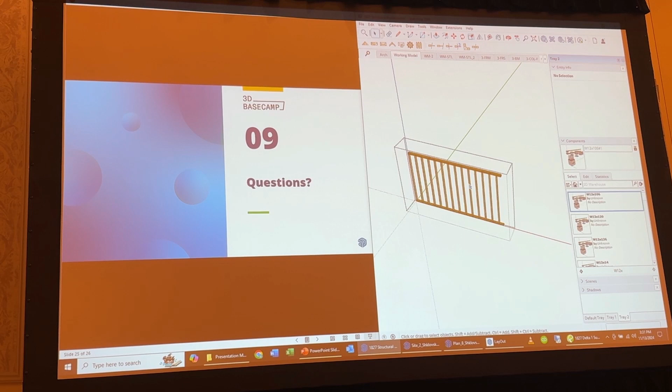Great, answer the question. All right, we'll take it. Yeah, would you not use Profile Builder?

Yeah, you could set up and do it. Again, we just started really touching Profile Builder, and that's one of those ones that if we can build it in and make it work right, yeah, but again, a lot of testing. You don't want to just implement it and then go, oh crap, we really shouldn't have done that. But yeah, that's another different thing, has to be this one.

Yeah, because of a lot of really cool stuff. The walls, especially, you could save some time there. But the way we do beams and columns, you could save a little bit of time, but then our layering gets a little bit weird, and how it comes in, whether it's on the steel layer, the wood layer, or a no-show layer. So that's where the testing comes in, and it's just on the list. Just haven't quite got to it yet.